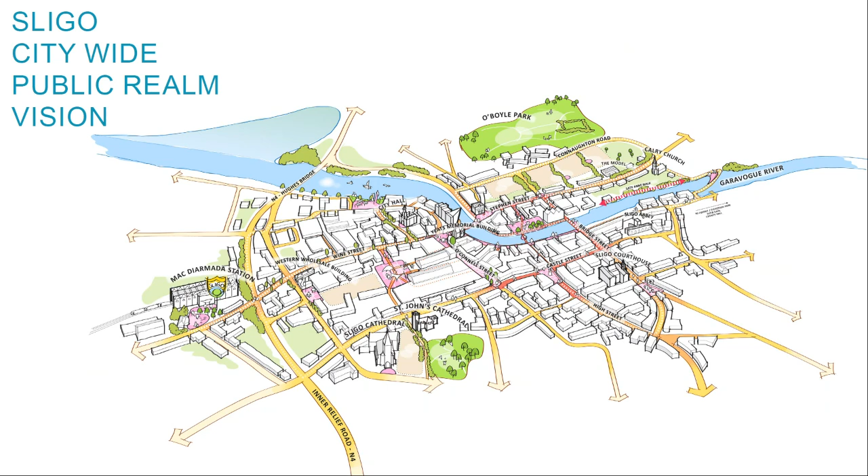So as Frank says, we're looking at a certain area within Sligo, but it's worth saying that this is actually part of a larger plan. This is the Sligo Citywide Public Realm Vision, which was produced a couple of years ago, which was a public realm plan that really looked at understanding the streets and spaces and working out how they're best going to work for the future. That's trying to take into consideration all elements from businesses to movements to the heritage elements, and trying to future-proof for how the whole world is actually changing.

So the vision statement back then was to enhance the image and setting of the historic city through the enhancement of its streets and spaces, conservation of its built heritage, encourage people to explore, businesses to flourish, and create a vibrant street scene. And we are very much trying to respond to that in the design of these streets.

The design guidelines which were put in place there are sort of like key things which we're actually looking to make sure we address: putting people first, design spaces for people, simplify the streetscape. There's a lot of what we call clutter at the moment of artifacts, whether they're bollards or other things, which we think we can actually design out. Ensure consistency in design and the use of materials, so it's a very much a coherent city centre and a nice place to be, and create something which is memorable and identifiable that you want to be in.

So perhaps for protecting the character and heritage, which is very special, and designing spaces to be flexible and suitable for multiple uses, which is a really key thing, especially in these changing times, where we're really looking at how things are going to change and how do we get it right.

So we want to resist the over design by putting too much in and getting that balance right, and ensuring that the public realm improvements support the functioning of the city centre, which is why we've been doing lots of these talks. We've done lots of surveys out there to really understand what's actually happening in these streets.

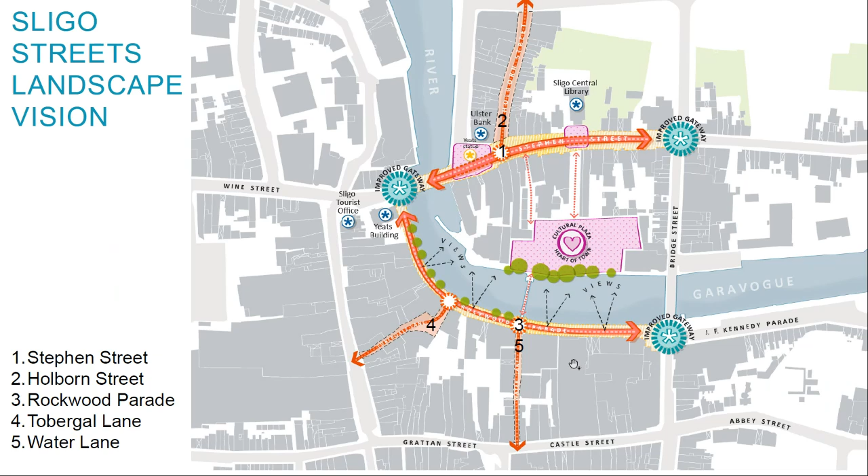So these are the streets which we're actually looking at, as Frank mentioned earlier. Stephen Street, Holborn Street, Rockwood Parade, Tobergal Lane and Water Lane. So these all knit together very nicely in actually trying to really make a real core to the city centre.

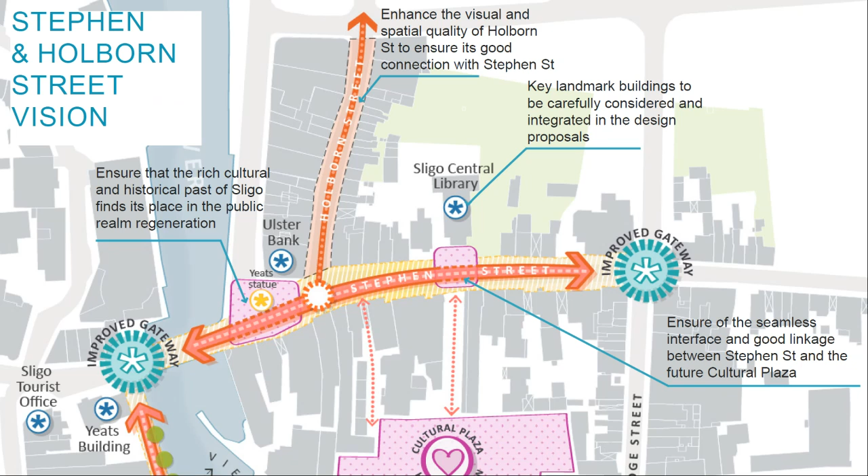So ensuring that the rich culture and history is there, understanding how they function. These are functioning streets as well, and making sure that the connections and how they tie into other projects are very much understood. And likewise with Rockwood Parade and the elements in the south of the river, making sure that we do actually really enhance that setting, make the most of the river setting, linking to the cultural plaza, which is already on track, and ensuring that the lanes are connecting to the other parts of the city centre.

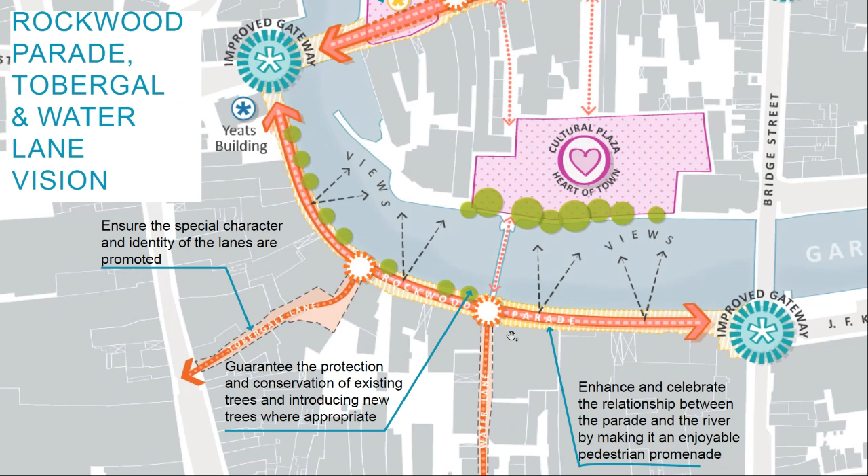So we've produced a couple of visuals, and we thought this was the best thing to do at this stage to really try to show and demonstrate what we can do with these spaces.

So Stephen Street, you all know this well, and we've looked at this space, and obviously we've got the Ulster Bank, which is a grand building, and we've got a beautiful street which actually is on the curve and meandering up the road. And at this point where it's taken, could nearly be considered the centre of the city.

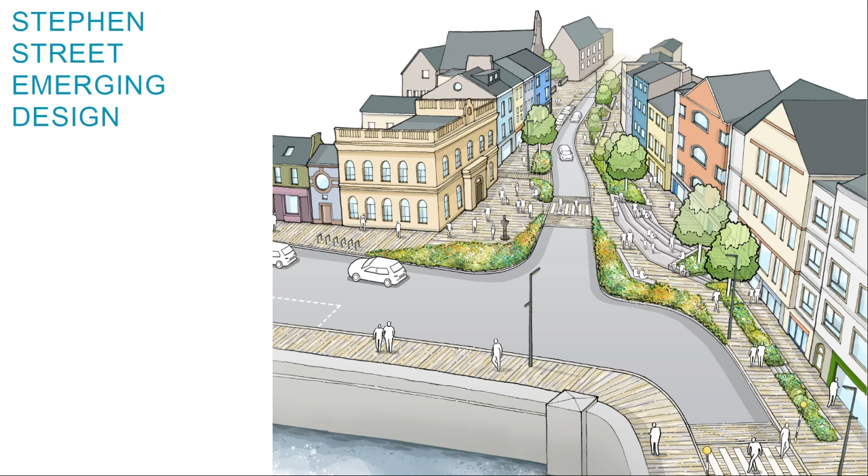So we sort of very much wanted to make a real place out of this. And the image which you'll have already seen probably is our sort of artistic impression at this early stage in the design process of what we can do.

So it's very much looking to provide wider footpaths for a better pedestrian experience, to remove the bollards and the street clutter, to provide a showcase seating and a stepped plaza, which we have the space for by removing some of those other elements. And that is working with those levels.

Celebrate the heritage, the architecture and the Yeats statue with seating and planting, and really try to make the buildings be a lot more in connection with the space, and bringing in greenery and trees for looking at well-being and biodiversity, and high quality paving and planting and street furniture throughout.

So it is changing the balance of this street, and we think with the cultural plaza happening, with the O'Connell Streets and the other work which is actually leading towards this area, we think this really will make a considerable change to both the look and feel and the ease of movement for all users throughout the street.

And it's trying to get that balance of making sure the street still functions, there is still parking on this street. The carriageway has been narrowed down. We have to look at how it works, what happens at different scenarios during the day and night, and ensure that crossing points and everything else are in the optimum position.

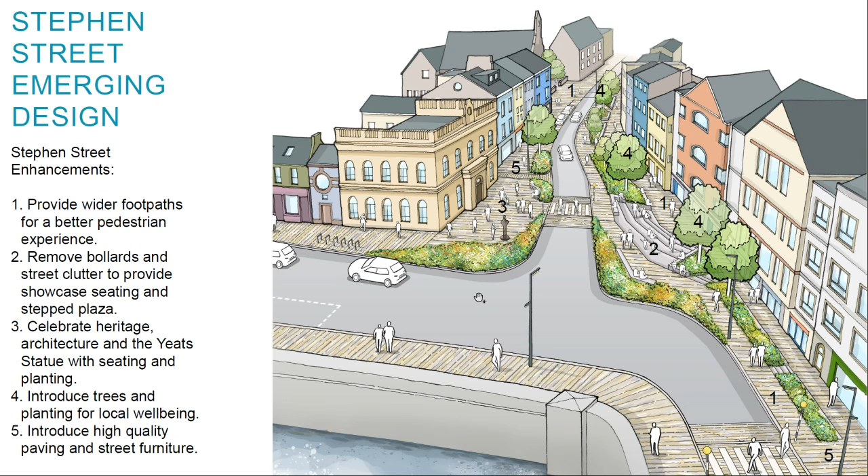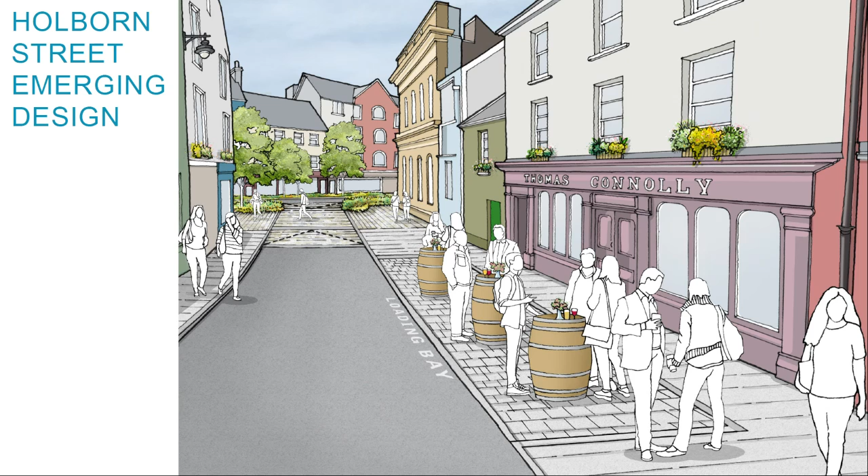And this image here actually shows another idea which we have to actually try to say, how can we get more use out of the space?

So in this case, there's been a loading bay during the morning, and then in the lunchtime and evening, it becomes a space which can actually be used by the adjacent business. This means providing wider footpaths where possible, removing overhead cable wires which are very dominant in this street, introducing new paving surfaces, and creating that opportunity for spill-out spaces for local businesses.

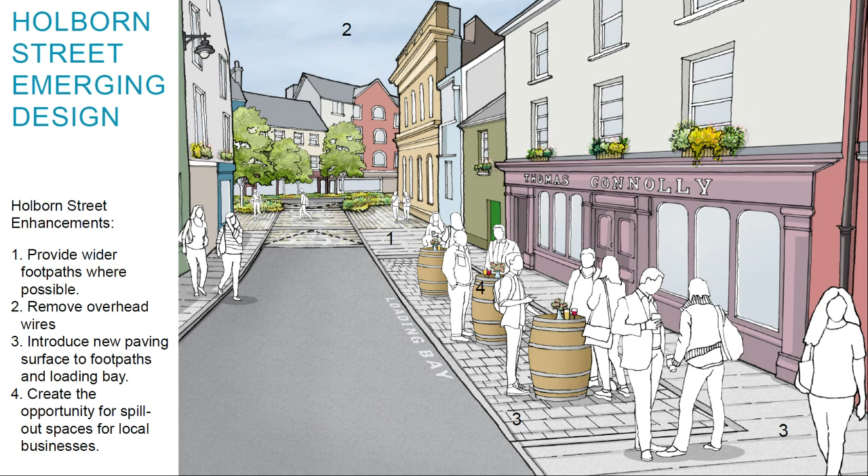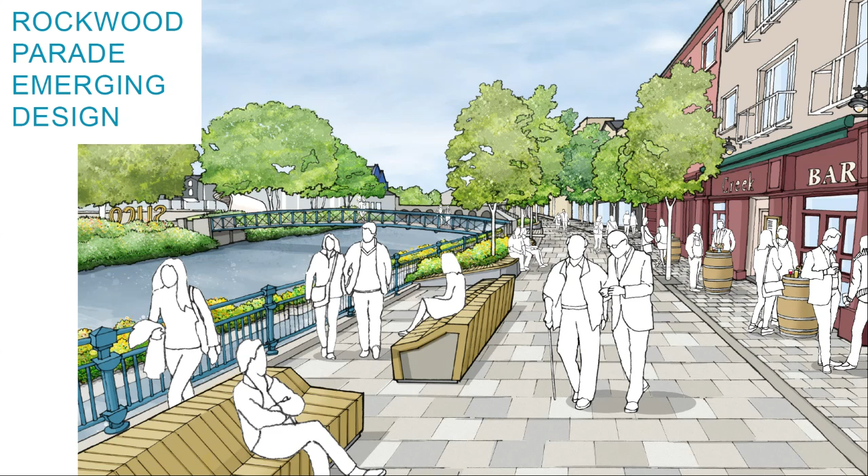We want to create this into a pedestrian zone with access only for those who are necessary to be there, like deliveries, and try to control how that access works so we really get the best out of the space. This means unifying both sides of the street, paving it throughout on a level surface, really making the most of having the view to the river and to the other side towards the cultural plaza.

We're trying to say, how do we help the businesses along there? How do we give them a zone that they can be using both directly outside the actual building, but even on the other side? And how do we get activity up, get footfall up, and get the users of the space really working as much as possible?

So it's creating that riverside pedestrian promenade with high quality paving and enough space to allow cycling and the access elements necessary for the functioning of the businesses.

Focusing on the riverside: activation, feature lighting, seating, highlighting the culture and interpretation where we can, conserving existing trees while adding some more where possible, to really get that balance right within the space, and defining activity space for local businesses with tables and chairs and other elements, which especially in these times is becoming very much a necessity.

As we move around the corner to Tobergal Lane - so this existing lane is quite a happening little space. It's two streets with a space in the middle, there are a lot of eateries around here, and we really want to help this and make it even more. So we're looking at how do we maximize the amount of outdoor available space, leveling off some of those surfaces to make it easier to put tables and chairs out.

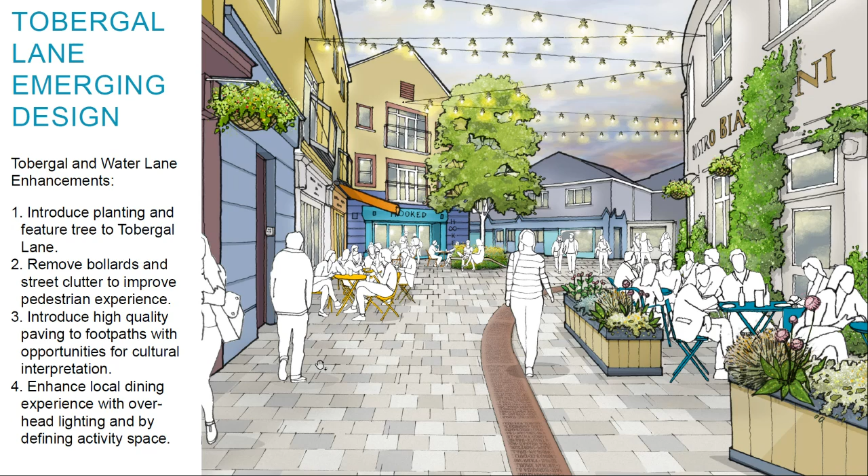At certain times of the day, the space can be used for one thing, and at other times we really want to control what's happening so we can get the most out of it. So the next steps are to collate thoughts and emerging ideas, and we really want to get as many people talking to us as possible.

We realise it's a very difficult time, and we would prefer to be standing on the street rather than doing this virtually. But the times are what they are, and this is an option which we've looked at to try to see what we can best do.

We want to incorporate those ideas into the vision and the designs, so we still have a design process to go through. We want to get as many thoughts, ideas and comments back as possible, and then we look to submit a Part 8 report, which has the drawings for all of these streets. We're aiming for November of this year to tie into funding streams and other streams moving forward, to make sure this project has momentum and goes somewhere.

In terms of engagement, we've been doing lots of business questionnaires. We've received quite a few, but we still need more to get a fuller picture. We're doing online webinars like this one this evening. We have a website which we encourage you all to go to. All this material is up on the website, and you can have a deeper look and leave comments directly there. We're also having stakeholder workshops with different groups in terms of the function of the spaces. We've produced lots of postcards, which hopefully you all have, and we've been putting those in different places.

We took the opportunity last week to be on street to actually just get passersby. Again, in COVID times, that was non-advertised, because we literally wanted to speak to people passing by and get their opinions on what they're experiencing as part of the street.